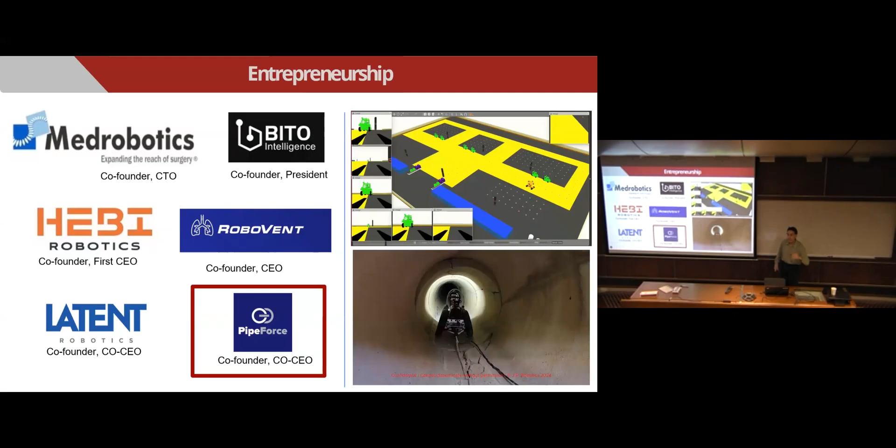So here, the hero of this story is not the robots. You'll see a robot, who cares? It's the mapping sensor, you'll see a little ring sensor. Being able to get sensor readings from confined spaces is one of the things my group is among the best in the world to do.

Building these high resolution digital twins of these pipes provides information and data not only that municipalities and cities need, but also if you're a construction firm wanting to build a new project.

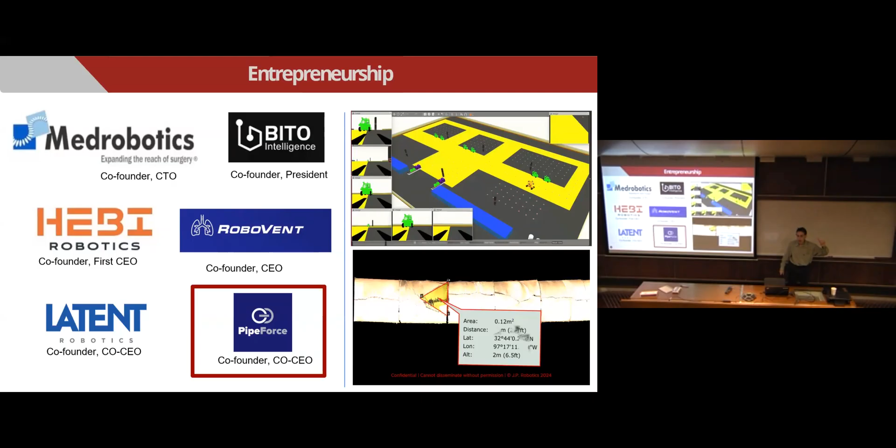I don't know how it is in Israel, but in the United States we don't know where our pipes are. In fact, anyone have a guess as to how often a pipe fails in the United States? Underground pipe? Every day? So one a day? Every minute? It's one a minute. So in the time we've had this talk, think of all the pipes that have failed.

So we're trying to fix that.

I also started this manufacturing institute, one of President Obama's manufacturing institutes. The idea was to bring manufacturing back to the United States, blah blah blah. I think that's stupid. What we want to do, as Americans at least, is be the innovators of the next generation of manufacturing. Let our peers in Asia and Europe have what they do.

And this is something else, it doesn't matter. The only thing is these two companies, this one I started with Mellon, are out of business. So they're not all success stories. Actually, I take it back. Success is what you define it to be, okay? But certainly still being in business is one measure of success.

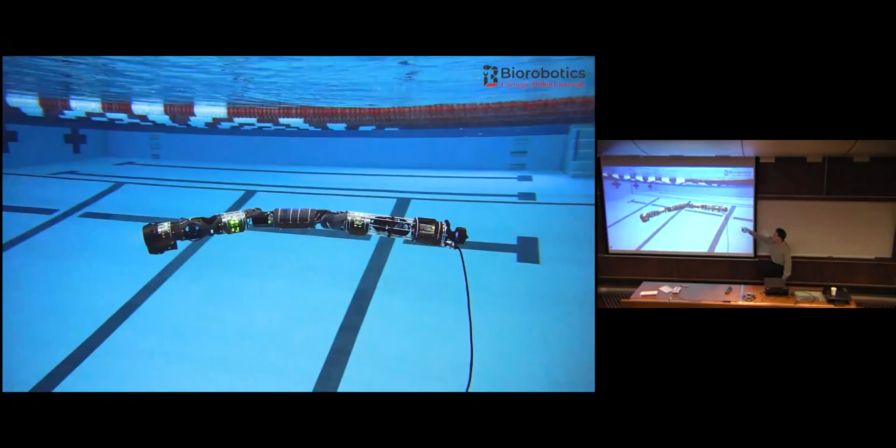So here's one of the robots we recently built. It's an underwater snake robot. The video is a little choppy, I'm not sure why. It took us about 6 months to build this robot, even though it's a pretty advanced underwater maneuverable robot.

Anyone know why we did it so quickly? Any guesses? There's two reasons. No investors? Nope. There's two reasons why we were able to build this robot so fast.

Nope. The first reason is we embraced modularity. So HEBI Robotics is that modular robot - we got very good at building modular systems. So maybe I lied, we didn't build it in 6 months. We built it in 20 years. It just took us 19 and a half years to build the modules, and half a year to build the robot.

The other reason is I've been very fortunate, as these two gentlemen can attest, to have been endowed with wonderful students, staff, and faculty collaborators to be able to do this kind of work.

One fun thing we're doing is this project that actually just got canceled - it's not a Trump cancellation, just so you know, but it was canceled. Saturn's a planet, and there's a moon called Enceladus which has the largest known ocean in the solar system. They wanted to go into the South Pole. This is JPL - this is where I used to go to graduate school at Caltech, and Caltech runs JPL.

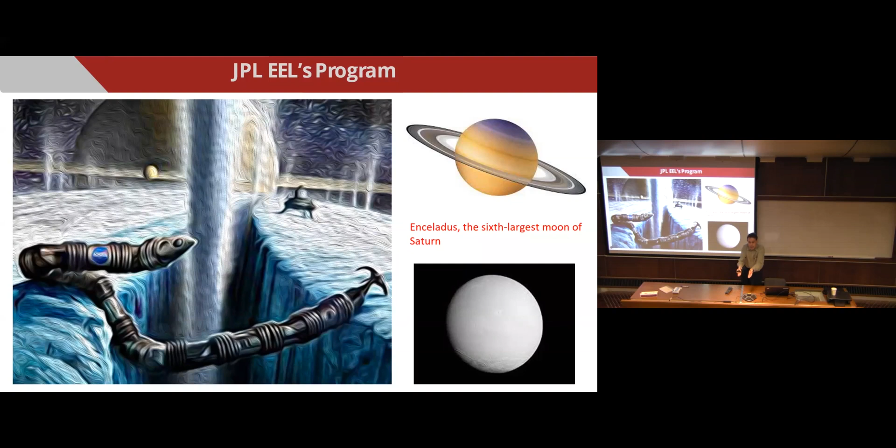They want to build a snake robot that goes underneath the South Pole of a moon of Saturn. There are these geysers, and it's only 2 kilometers thick. A robot goes inside and swims in the largest ocean. They were saying there'd be life there. There's no life there, we know that. But if someone says, 'Hey, do you want to build a snake robot to go to a moon of Saturn?' The answer is an obvious yes. I think all of you would agree, you'd do that too.

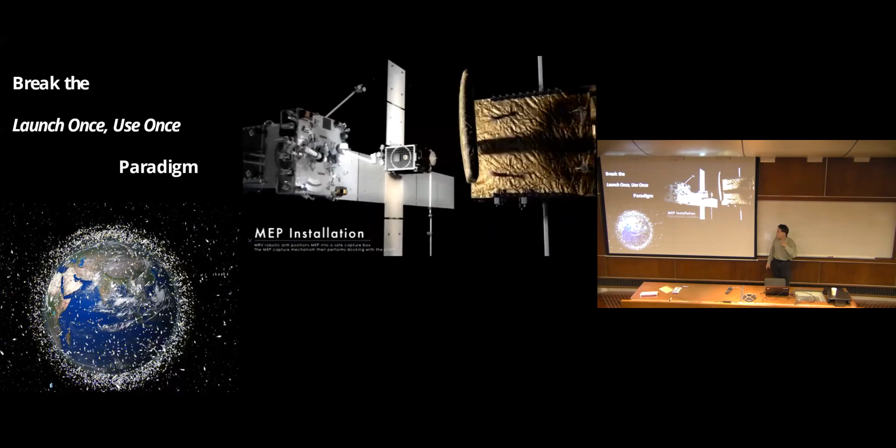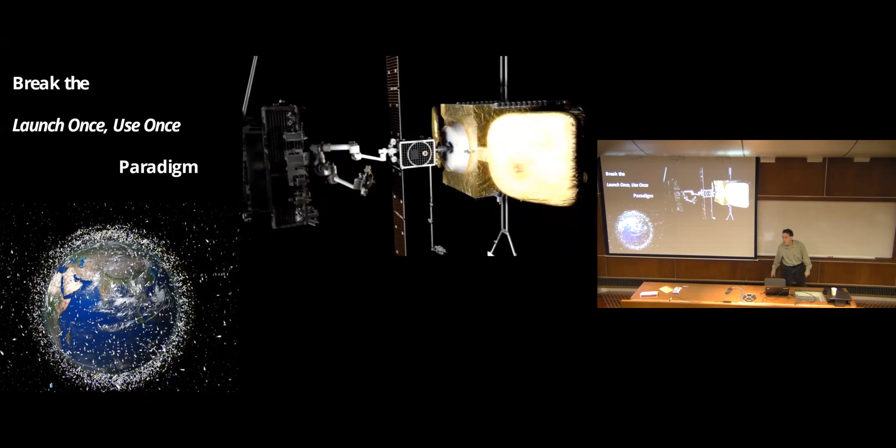However, there is other work in space that we're now doing. Space is no longer just education or entertainment for wealthy nations. It's actually a new business in space. So right now, anyone have a guess as to how many satellites are circling the Earth? 8,000. When I started this project it was 6,200, now 8,000. How many of them work? Half. Yeah, half, not five. How the hell are we talking right now?

So it's half, and the reason why is these satellites were designed to only work once. Once they run out of fuel, once they live their lifespan, they're done. It wasn't that they were bad—well, some of them are bad. So what we want to do is be able to refill the gas tank, so to speak. Really, what we're doing is putting a mission extension payload into the back of an existing satellite. It has a new tank of gas, a new navigation system, and then voila, you're back in business. Think of the trillions of dollars floating around in space, and all we have to do is solve a simple peg in hole problem.

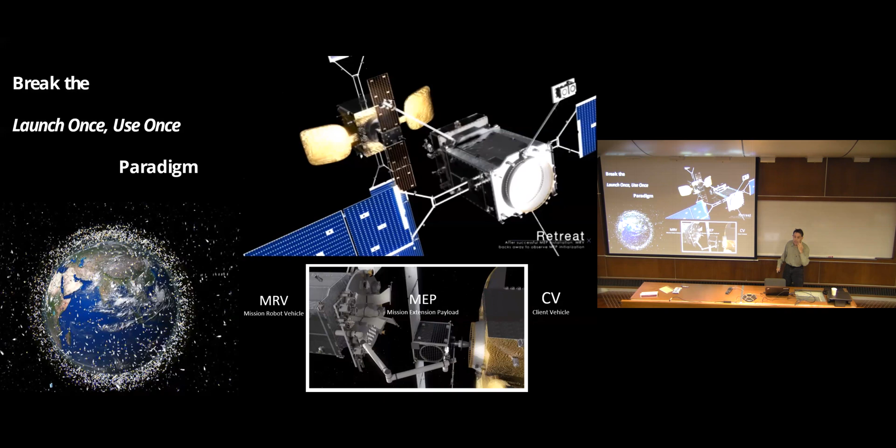The only thing is, it's a little bit different from a peg and hole problem—remember, you're in space, so you're floating around. It's a little more complicated, but still, I want to say it's not rocket science, but it really isn't. The real trick is managing contact, how to do planning with contact in space. And what we did for that is we built this system.

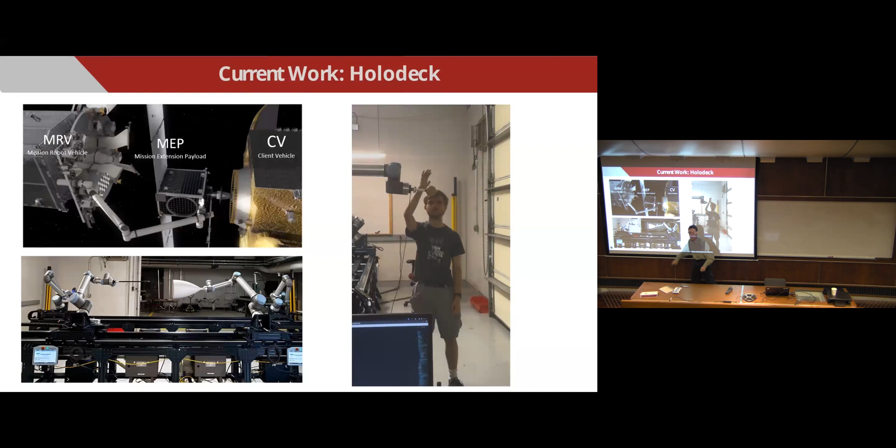We call it a holodeck. Here are these UR5 robots, on a rail. Here's the tailpipe of the satellite, here's the peg for the mission extension payload. And what we're doing is emulating being in space. So I'll play this video—let's see if it'll work. If you go up to the tail and give it a push, it'll float away as if it's in space, because we can't emulate lack of gravity in my lab, and you really can't do it anywhere.

Up until this point, their plan was to make it work in simulation and then launch into space and hope for the best. Here, not only can we simulate being in space, we can also simulate being underwater, or if you like being in honey, we can do that too. What's cool is now we can program these robots, understand the contact mechanics, and simulate it in a gravity-free environment—real data, not simulated data.

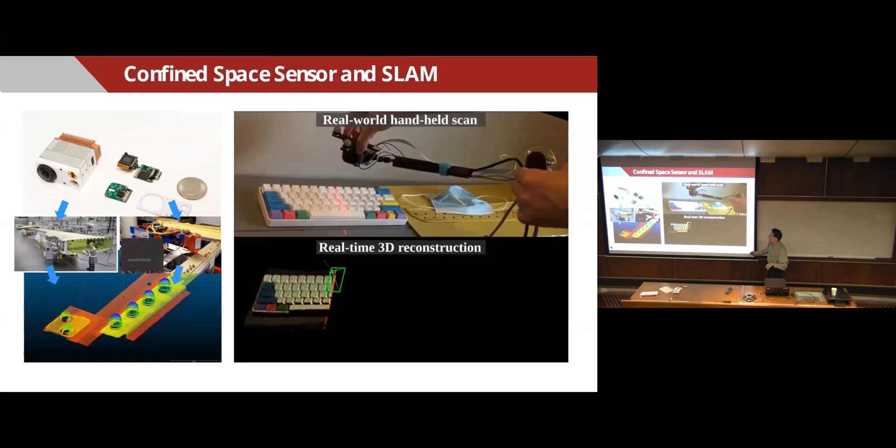So this is another sensor we built. We're very good at building embedded sensors, and here it is scanning things in. We built this for Boeing for manufacturing in confined spaces. And then another robot—these are force sensors that we've gotten very good at building. This is a needle insertion, ultrasound-driven needle insertion robot.

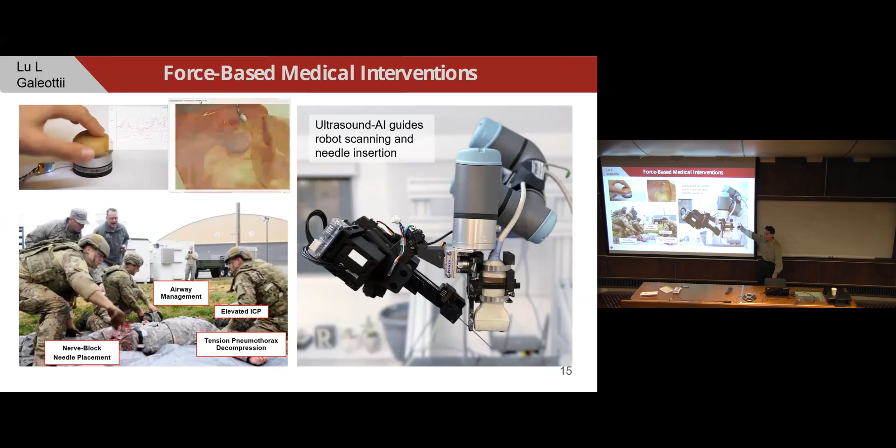Really, this needle insertion and closing the loop on force is nice. This ultrasound probe is processing the ultrasound data—that's the star of the show. It's closing the loop. The robot really isn't that big a deal. Actually, even closing the loop, the algorithm or machine learning we used isn't a big deal either. It's generating the synthetic data that matters.

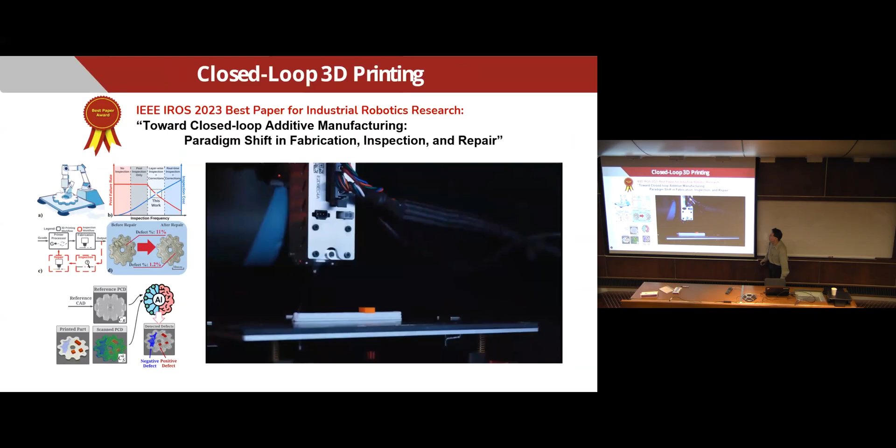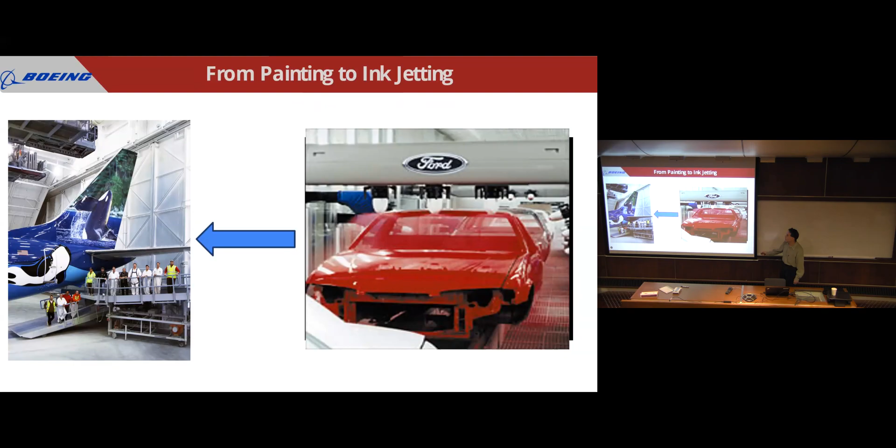We've gotten into putting our sensors into 3D printing machines to regulate 3D printing of materials, but also repairing devices out in the street, out in the wild. And then we do a little bit of car painting. I did this work with a deaf Jewish Cuban refugee who was our point of contact at Ford. And recently we started doing airplane painting, really inkjetting, with Boeing, with a regular white Christian American. But it's still a good project.

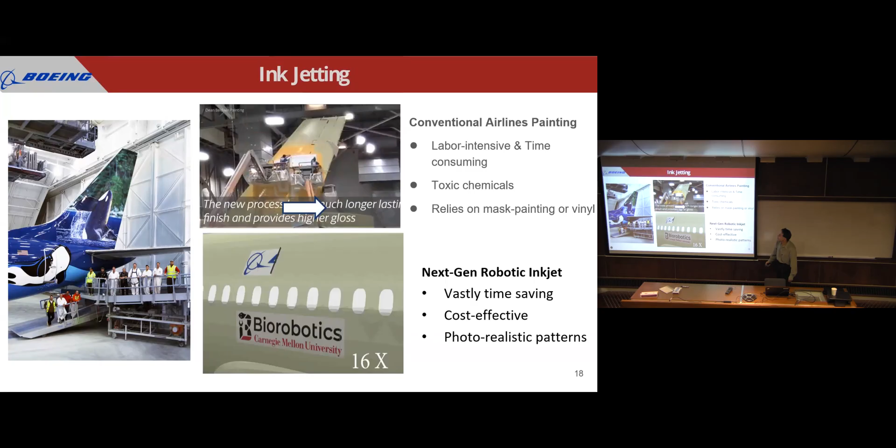I think I'm very fortunate to have these people work with me in developing these nice systems. But the reason why you talk with us among faculty isn't to build new systems.

That's what industrial engineering or project engineering people do. You come to us when there are scientific problems that have to be solved in order to build these systems. So as a professor, these are some of the ideas we think about in my research group: how to make problems simple, either through dimension reduction, interleaving search, and so forth.

Lately, some of you may be aware of the recent craze in AI. For those old enough to know, AI in the 80s was a bad word, now it's the word we all take. The thing is, to me, it's still like a black box. Here I am developing algorithms that do wonderful things with intuition, and then some kid in the basement of his parents in the Netherlands uses a machine learning algorithm and outperforms what we do. I'm still confused about that.

So you're all getting me going through this existential crisis of where research is going to go. I don't really believe machine learning algorithms are going to make humanoid robots, create an army and beat the good guys. Because, well, for one thing, the war better be over in 30 minutes because the power runs out then. I just think robots are such a difficult problem to play with that we still need the fundamentals.

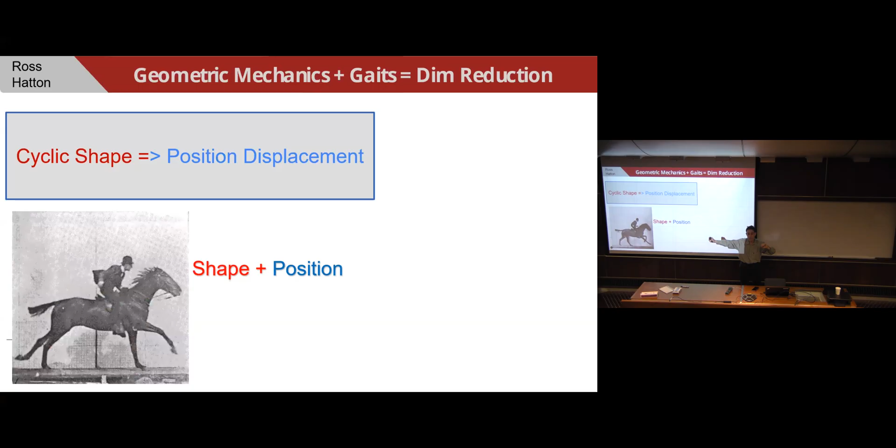So when a horse gallops, it's having a cycle in its shape space to cause a displacement in its position space. That cycle is called a gait. Now, you don't have to have legs to implement gaits, lots of animals without legs do it too.

To the roboticists here? Jacobian. Thank you, he who has seen this talk before. We call it a connection. It's a little bit different from a Jacobian, just a little bit.

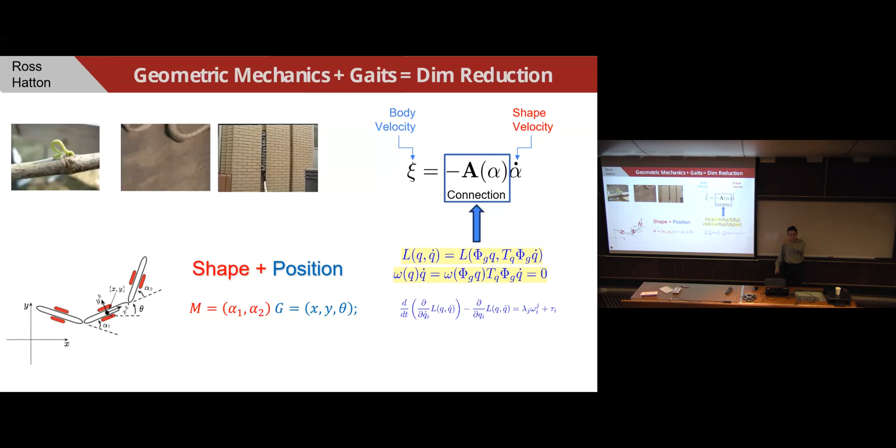However, our contribution to this work of geometric mechanics—people have been thinking about it, including Nobel laureates—ours was, and now the roboticists are going to go, really? That's it? Was applying what we know about the Jacobian to geometric mechanics. That's it. So let's look at this Jacobian geometric mechanics.

What I did here is I plotted a row of that Jacobian for this robot here. Its position is X, Y, theta, and its joint angles are alpha 1, alpha 2. So for its Jacobian, its connection, I plotted the first row.

It's a vector field. Each row corresponds to a vector, and each vector in this vector field is for a different shape. So if I'm at this configuration and I excite my joint angles in this direction, I'll get maximal X displacement. If I'm at this configuration and excite my joint angles this way, I'll get zero displacement, because the dot product of orthogonal vectors is zero.

So what you got to do is just draw a loop in this vector field and off you go. All right, that's hard. So what we did is we took recourse to Stokes' theorem. Stokes' theorem: you take the path integral, and inside is the curl.

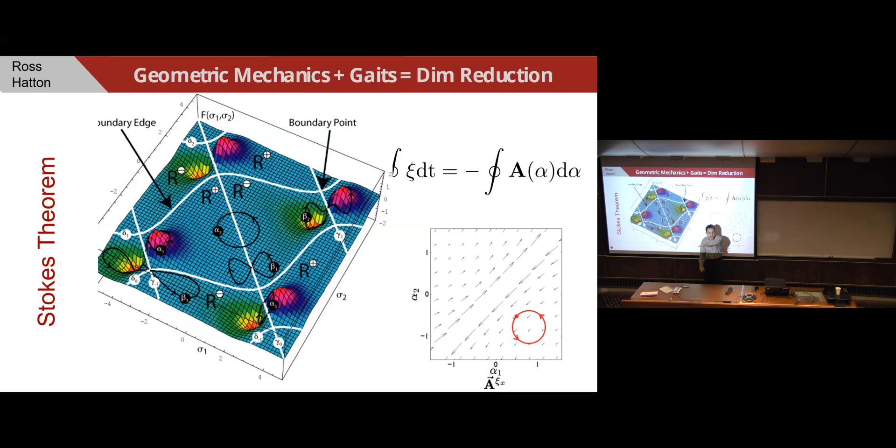You have the curl, and you have this beautiful height function where if you draw a loop, you get the same thing. You can just look at the volume contained in the loop, and that tells you how much you'll displace. So if you have this valley here, you get a lot of negative displacement. This is no displacement because the left and right are the same. These white lines are zero. This is all positive, all negative. You want to draw loops around big positive bumps or big negative bumps.

Voila, you're designing gaits. So this picture here is a little faded - I can't blame your computer for this, this is my fault. The vector field here, the height function on top, you see we're drawing a loop. In the X direction, we get that volume that displaces us in the X direction.

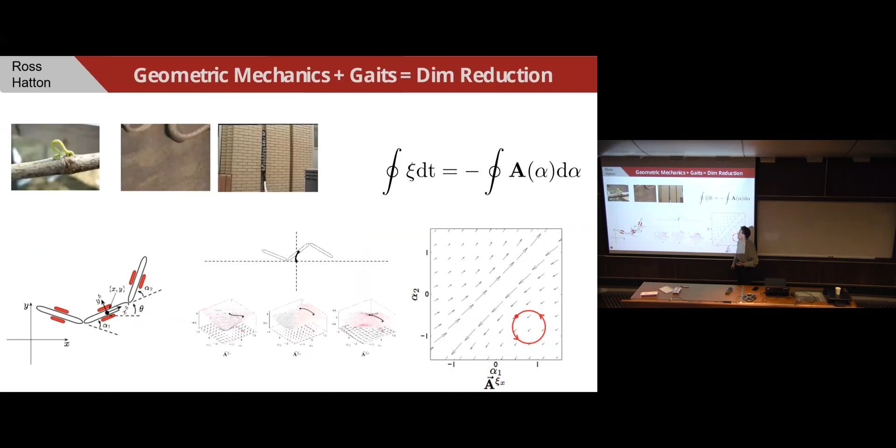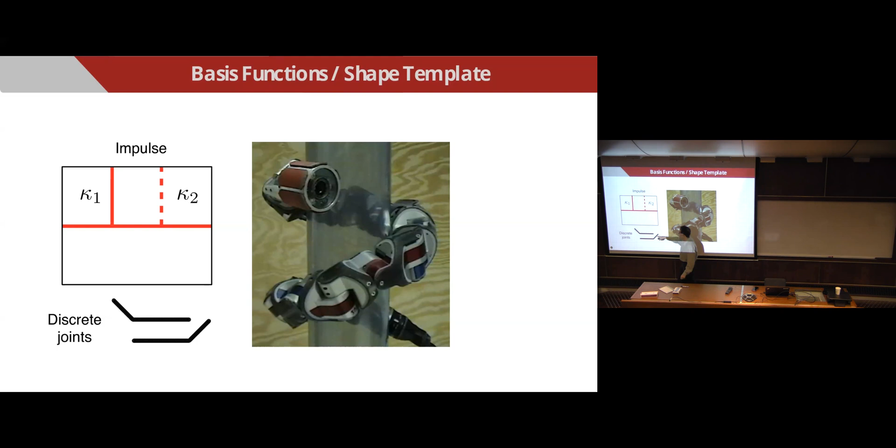Easy peasy. So you're probably thinking, what about the snake robots? Here's where dimension reduction first comes in. If you think of that 3-link robot where alpha 1, alpha 2 are joint angles, instead plot the curvature of that robot, and at the joint angles, you have a Dirac delta for the joint angle. So instead of doing the Dirac delta, what we'll do is use these beautiful sine and cosine functions of curvature.

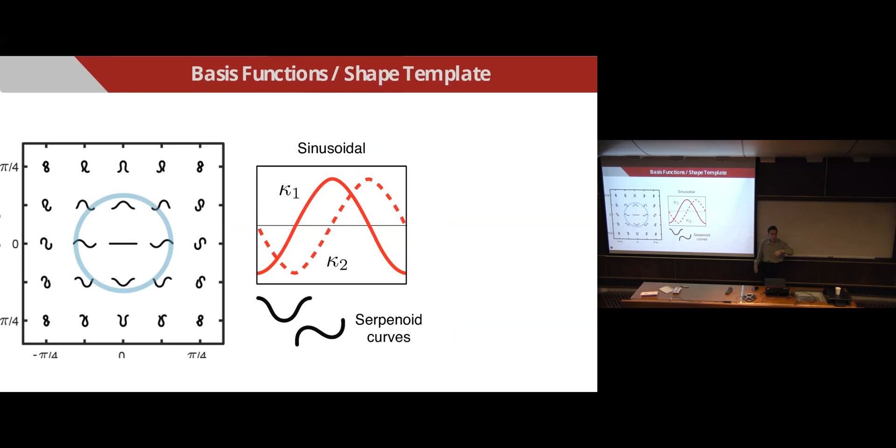So we're no longer looking at joint angles, we're looking at coefficients in front of modes. And by doing the inverse kinematics, so to speak, or determining what the loop is in our shape space of those coefficients for the modes, we can get this robot to move forward. This is a curve called the Serpenoid curve, which Professor Hirose intuited back in 1971. We were able to show, by combining something that Greg Chirikjian did, with our work, that this is what you get.

So what we do instead is we built these new actuators, called series elastic actuators. So you have a motor, there's a spring, and there's the output. If there's no load, everyone spins together. If there is some load, there's a torsional deflection, and from that you can compute how much torque is on that joint. You can close the loop for force, so now we have a way of delivering force or closing and sensing force with our actuators.

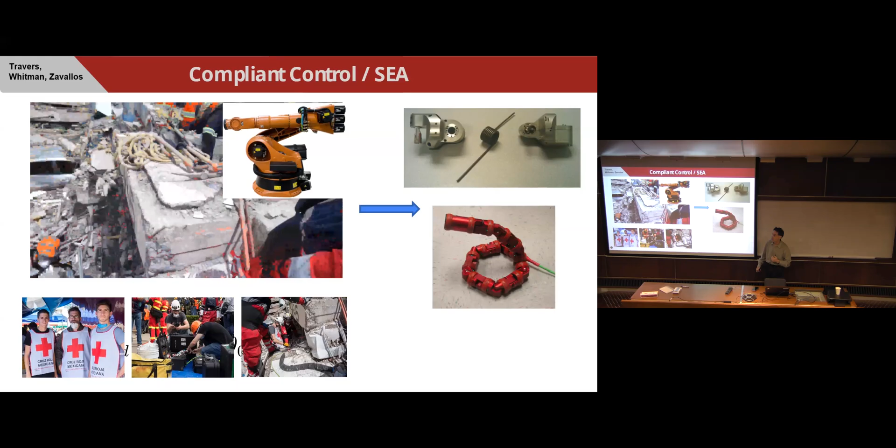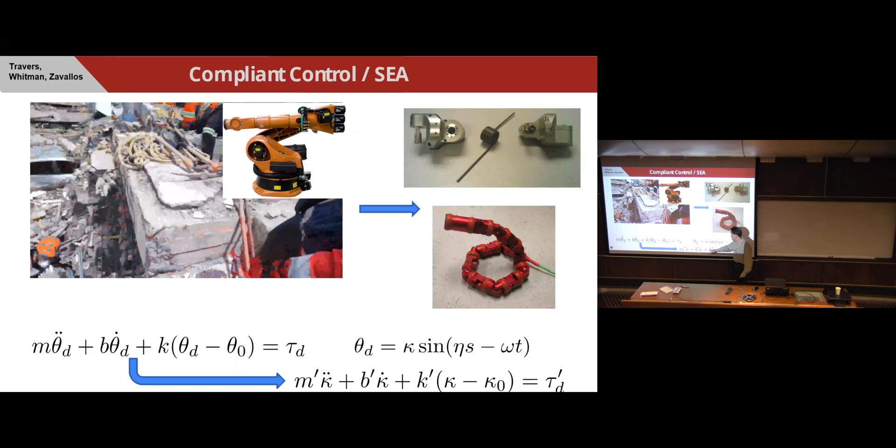So what we did is we wrote out this impedance controller. And again, we used our gait equations to get from 16 joints down to 2 joints. And we literally just run our gait controller, our impedance controller, on this gait space.

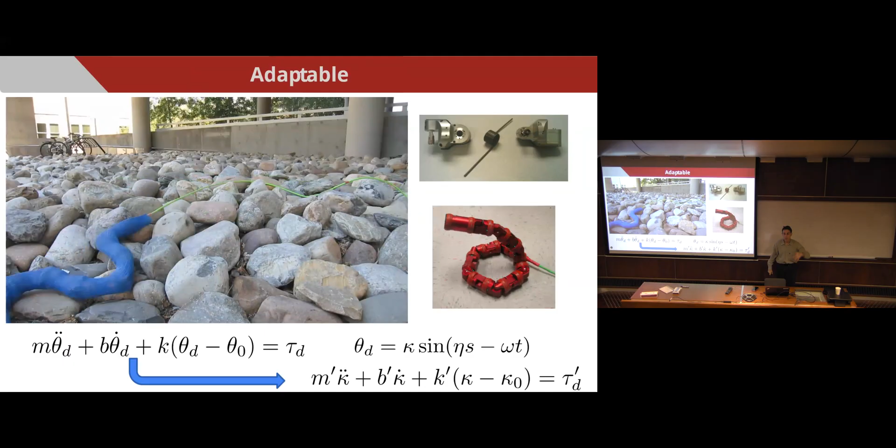We put the robot on this pile of rocks. It is told, go move on this flat ground, and the impedance controller does the right thing to overcome these obstacles. Of course, there's a certain size where this won't work anymore - so this is just a controls problem. Once you have to go to a higher size, it becomes a planning problem that I'm not ready to think about. That's one of the reasons why I'm here, to find collaborators.

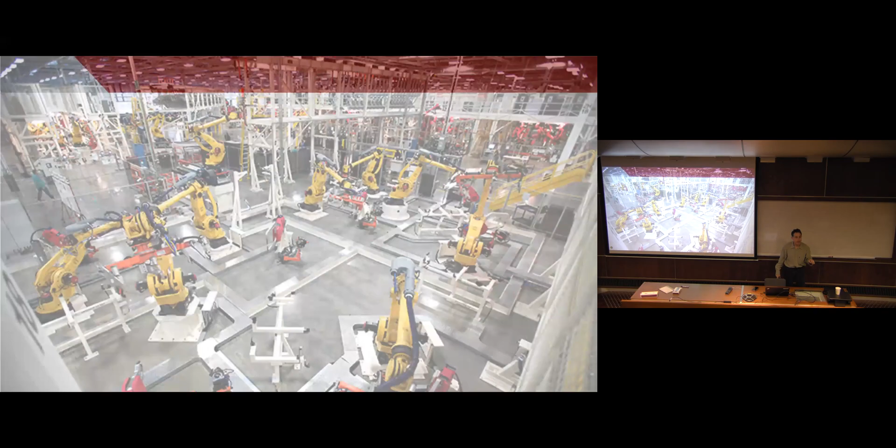So let's see, there's a funny cycle we're going to make here in terms of manufacturing. Remember I told you about that manufacturing institute - if you look at this manufacturing facility, do you see the cage for the robots? Where is it?

No, the cage is for the people. The people and the robots are isolated. This is what manufacturing is today.

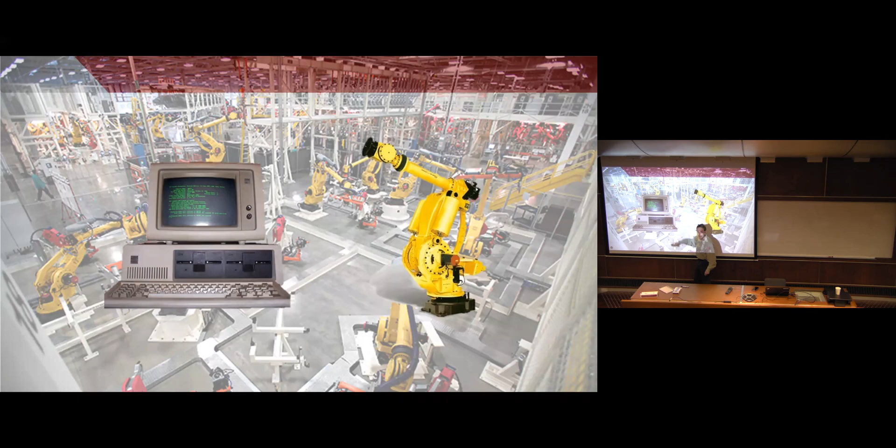What's funny is if you look at a robot in the 80s, and you look at a computer in the 80s—Dr. Degani, you remember these computers, those are floppy drives. Now in the 90s, computers got a little bit better. Robots stayed the same. And computers are even getting better. By the way, the founder of this company was my student, Matt Rogers.

So one of the things we want to do is make these modular force-feeling robots do other assembly tasks that conventional robots can't. They can't, because they have to be very precise—if they're off by a little bit, boom, something breaks. Now if you have compliance control, you don't need as much position control.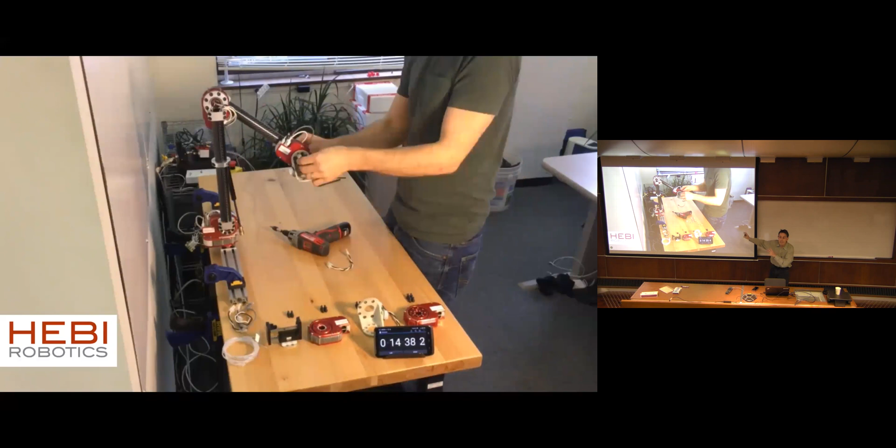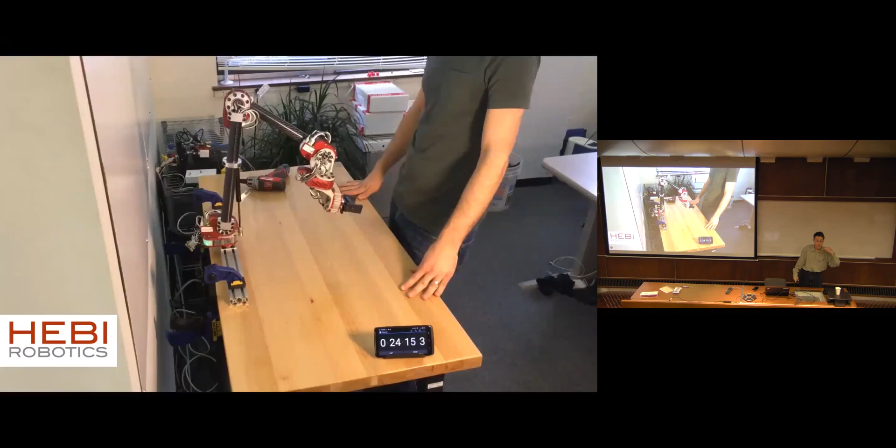Here we're showing one of our engineers building a robot arm in 24 minutes. So one of the things I'm trying to push is this notion of mass production in quantities of one. And if you can customize your automation almost every day, you can customize that product.

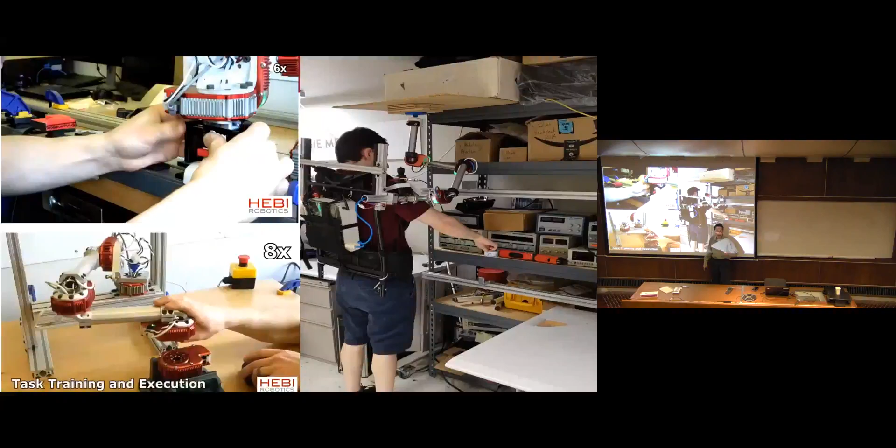So there he is. It's funny, look at all the different robots we're able to build with these modular robots. Here you can see he's teaching how to plug something in. Here we're assembling screws. What makes this a success is that he can feel the force in.

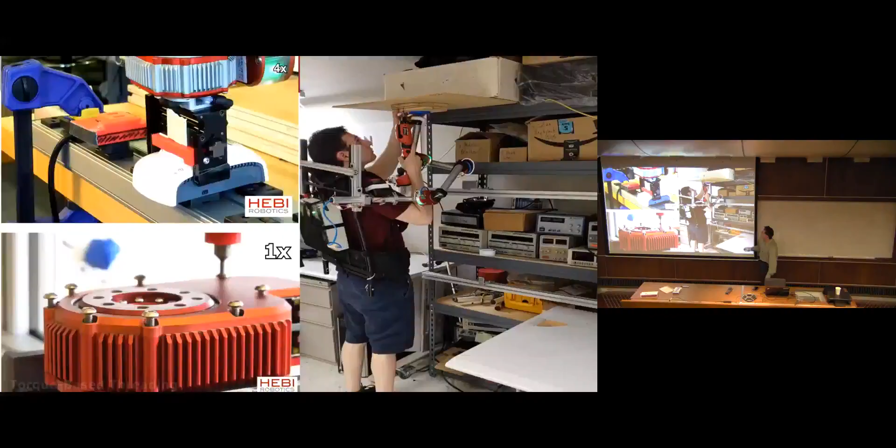This is Julian again, this is sort of as a joke—so exoskeletons are not a joke, let's be clear there, okay. But he built this backpack robot, which gives him a third arm, which people both in the auto and airplane industry wanted, because they want to be able to hold something up while they're doing their thing.

So the thing is, it's kind of a funny question: given a task, how do you figure out what robot to build? Okay, here's one little thing I'm going to confess. When we talk about something that's geometric in basis, I go into a little bit of detail. When it's machine learning, I just show one slide. I don't know why.

But what Julian came up with was this network—it's a discriminator-generator network. You pretty much give the robot a task, let's say navigate over some terrain. And you have some latent prior, I don't know, God gave it to you, or your friend gave it to you, who knows. It goes into a generator and it just generates a bunch of designs. We then evolve those designs using whatever evolution network you want—that's not a big deal.

And then you have this discriminator over here trying to figure out, was this an original design or an evolved design? Now some of you with machine learning background know this network from the vision community—they ask, is this a synthetic image or a real image? It's the exact same network, except is it a generated or evolved design? And then you build this discriminator, and now you have an arms race: can the generator build something that you can't tell is evolved? And when the discriminator finally says 'I can't tell,' you stop. That's how we generate our different modules right now.

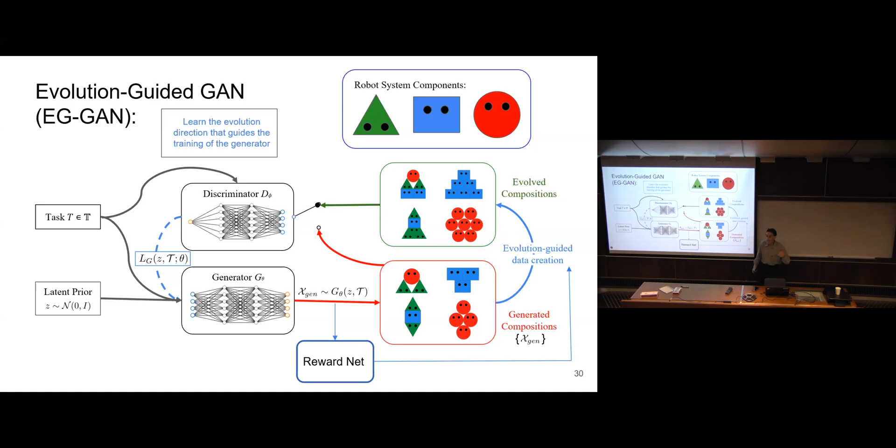And that's the best we can do. I hope we can do better. This reward net is a detail I don't want to get into right now.

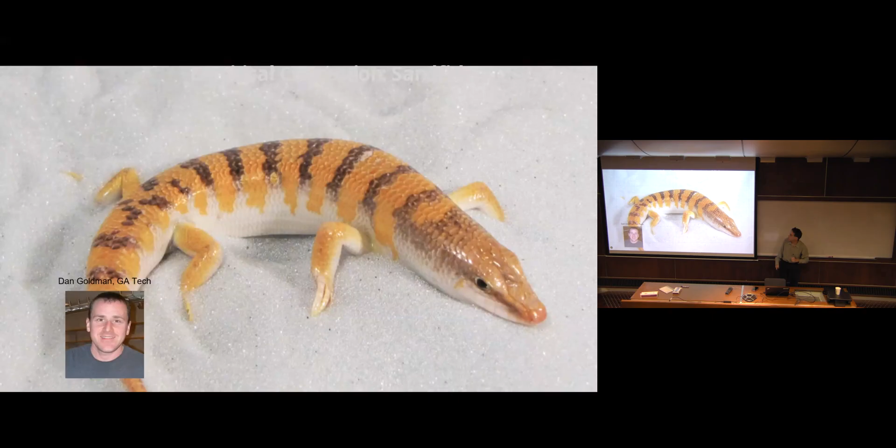We were challenged by going up sandy terrain. We couldn't do the sand. So at the same time, my friend Dan Goldman was studying these lizards called sandfish. These sandfish kind of tuck their legs in and go quickly in the sand. He built a robot, I just named it Danbot after Dan Goldman, in these little yellow BBs. It's a 3-link robot, like you saw before. And what he tried to do is simulate how to make his 3-link robot work in these BBs.

So Ross Hatton, my student, noticed this and called up Dan, and said, hey, we have an idea for you, we have all this geometric mechanics we can use. So what we did is we put the robot at every possible configuration, tweaked little velocities, noted them, and for some reason the universe was kind to us. The relationship between the input shape velocity and the displacement body velocity was linear, just like the connection, just like the Jacobian. I don't know why that's possible, but that's what happened.

So we created a height function again, and we're able to draw these gaits that just work instantly. There's no way a human could intuit to make a gait in a granular fluid to rotate in place. No machine learning algorithm will produce this without the knowledge of the geometric mechanics. This is something we're very proud of, because it was the fundamentals that got us this capability.

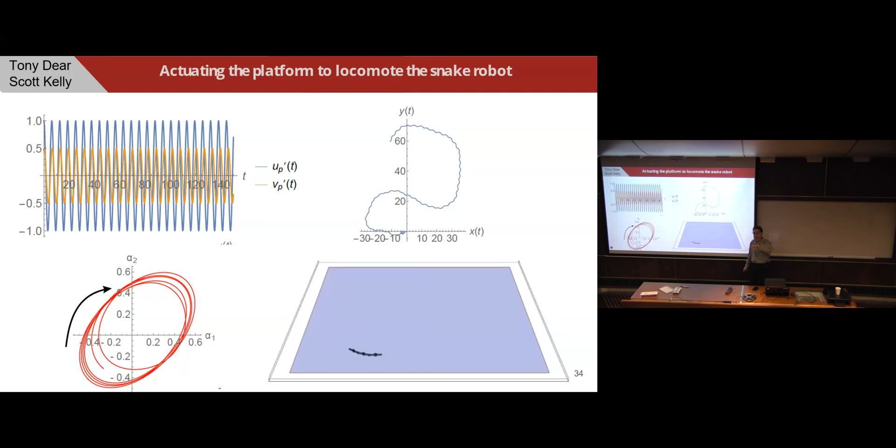What we did is we put this 3-link robot on a moving plate. My student, Tony Dear, working with Scott Kelly from grad school, we were able to develop gaits where either we shake the plate and the 3-link robot moves, or the opposite: you put the 3-link robot on the plate and it makes the plate move. That was Tony's thesis.

Now I have another student who wants to take this 3-link robot and cause another robot to move. For those who know about mechanics, what we're encroaching on is the experiment where if you put a bunch of metronomes on a movable plate, eventually they'll all synchronize. Yeah, we rediscovered that, but we really haven't gotten much further in this. I'm really hoping to figure this stuff out soon, because the funding runs out next year.

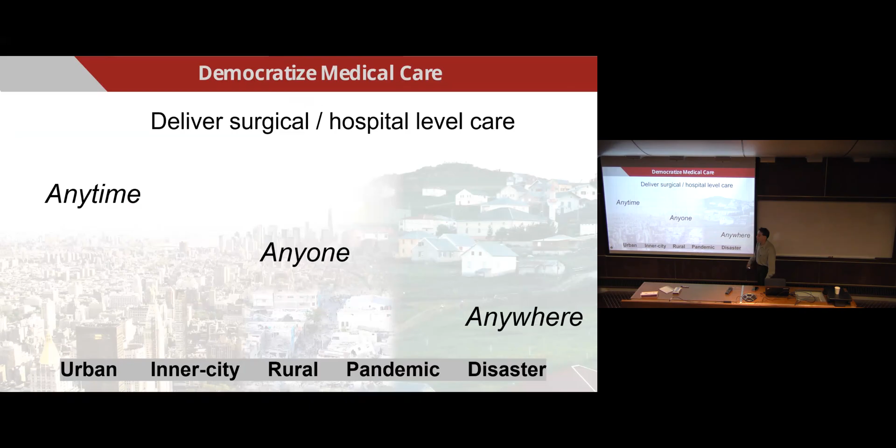All right, let me talk about medical snake robots, changing subjects. One of the things I want to be able to do is democratize medical care. I want non-surgeons to deliver surgery-level care. I want technicians to be able to do what doctors used to be able to do, so more care can be received anywhere by anyone. This is one of my personal things, a philosophy I started with a long time ago.

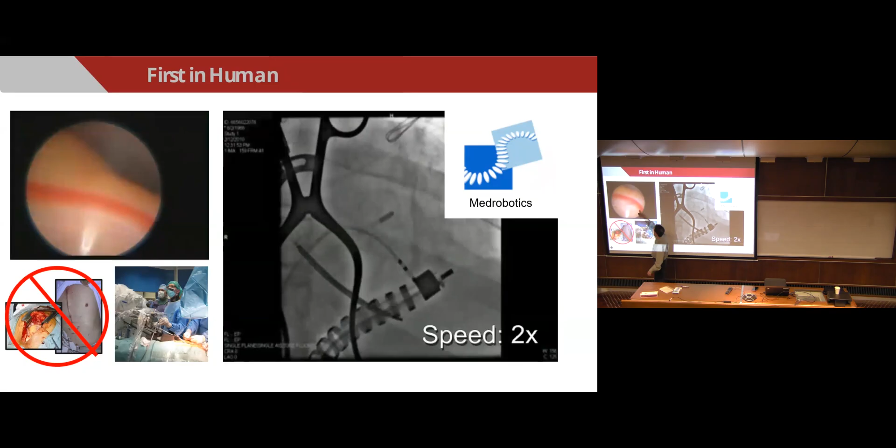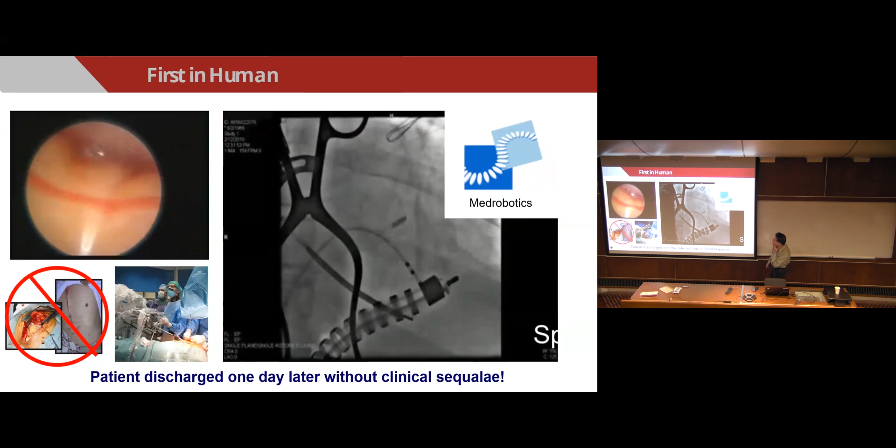So this is the surgical snake robot. I'm sure you all know the benefits of minimally invasive surgery. And this is the actual proud moment: this is from our first in-human procedure, where the snake robot is going around a 75-kilogram woman's heart. This is the direct visualization. Here's the beating heart, and you see her lungs up there. Your lungs are pink if you don't smoke. And there we are, that's nice. The thing that's pretty impressive is this woman went home the next day, and this procedure was done without a surgeon.

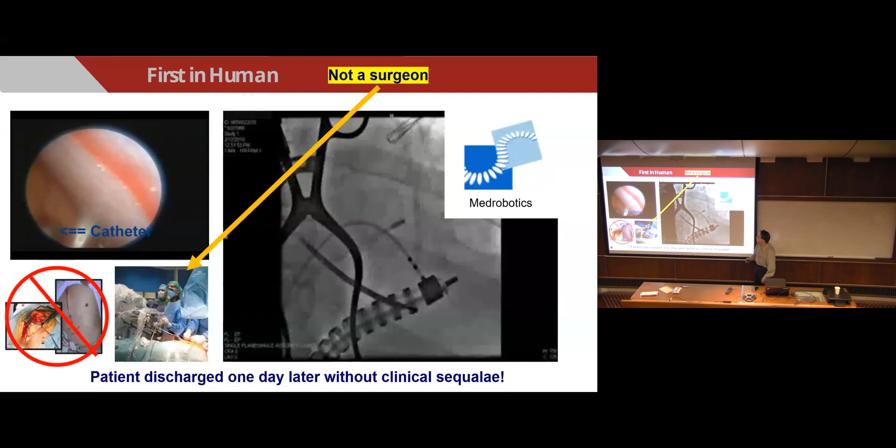But we did have a successful first in human procedure, and the company lasted 10 more years. Where we are now is this robot did clear the FDA. It's the first surgical robot to clear the American FDA with the word robot in its indication. So in the eyes of the United States government, Alon and I invented the first medical robot, if you want to believe that.

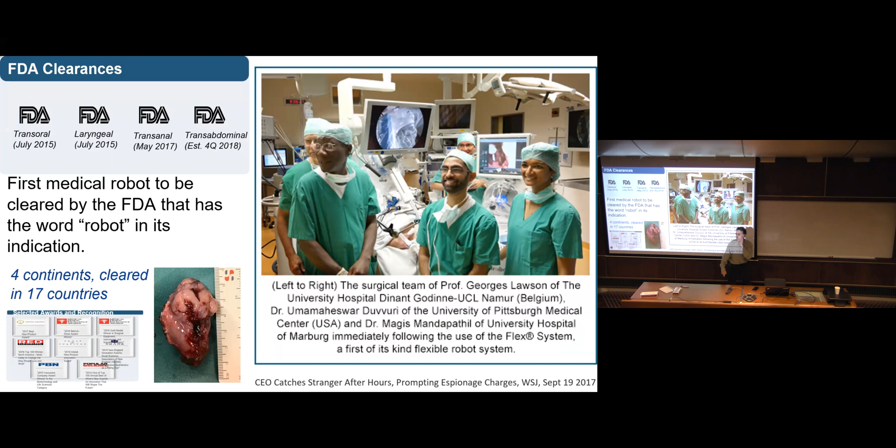This is cool. This guy in Belgium removed a 6-centimeter tumor out of someone's neck. No broken jaw, no radiation. The guy went home and had spicy food the next day.

This is what I want to work on, natural orifice surgery. This is one of my white whales, something I want to do. The idea is you go in through the mouth or up the butt, or in a woman's case, other organ orifices. You poke a hole in the luminal space and perform the procedure from there. A lot of you are thinking that's not good, but your luminal space is meant to heal, certainly much better than your flesh, bone, and muscle.

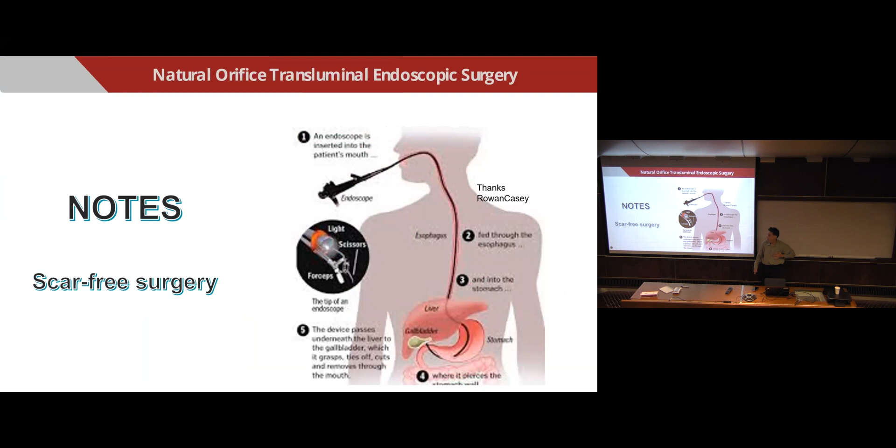So the procedure I was always interested in was going after the head of the pancreas for pancreatotomy. Because if you have pancreatic cancer, or if they suspect you have pancreatic cancer, you're in a lot of trouble.

Here, I know some of you didn't think you'd see a snake robot shoved up a pig's ass today. What's even better? Two of them.

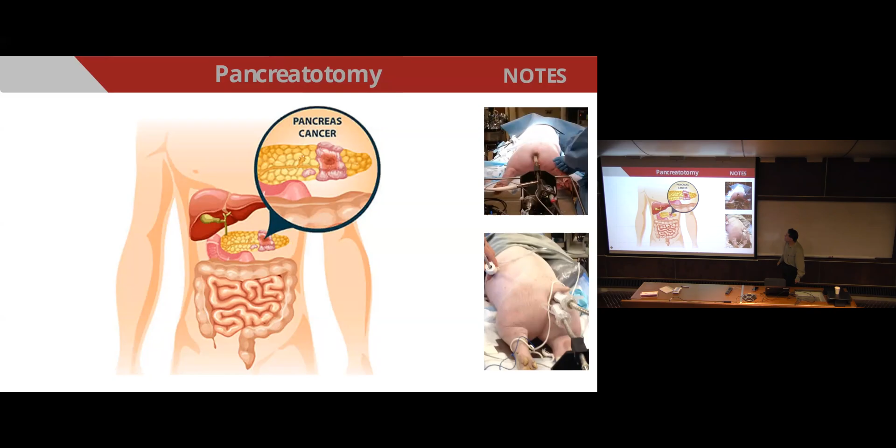So here we are operating on this pig. We needed one robot to see, the other to do, and we're removing the tail of the pig's pancreas, not the head. This is something that's really been on hold for many years because I haven't been able to convince sponsors to do this kind of work. But I have a good feeling that's going to change soon. This is another kind of future work I'm looking to do.

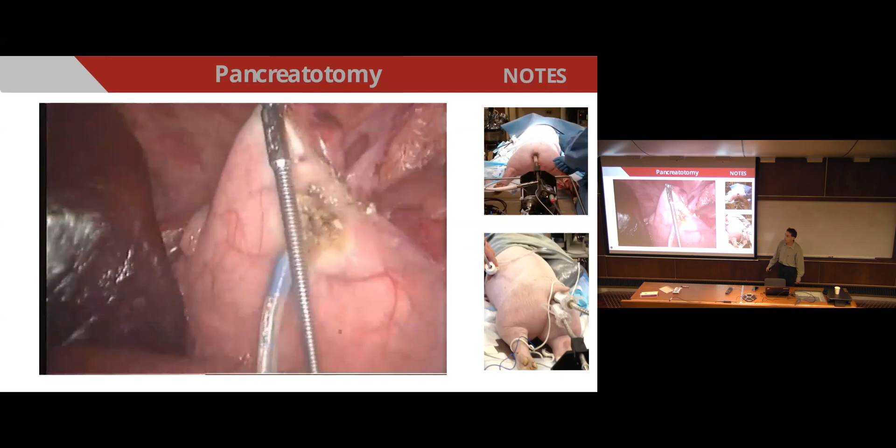So let me change subjects and talk about ultrasound. Here's this needle guided by ultrasound. Nobody likes looking at ultrasound, right? The only time you're happy to see ultrasound is if it's a baby and the baby is yours. After that, no. The benefit of ultrasound, however, is it's portable, not that expensive, and non-lethal. The thing is, it's noisy and difficult to interpret. There's a lot of problems with ultrasound.

What we did is we developed this algorithm, which I don't think is such a big deal. This is around the time when Dan was here at CMU. We developed this algorithm called U-RAFT, and it's able to do an impressive amount of vessel deformation. Actually, the algorithm itself is not that impressive.

What is impressive is that we generated the synthetic data. I really want you all to pay attention to me.

Can you, Jeff? Yeah, please. I came really far today, I had to take two trains. And likewise, when you come visit me, and I hope you do, I'll show you the same courtesy.

But what really made this work impressive is we don't have labeled ultrasound data. It just doesn't exist. So what we were able to do is develop an algorithm to synthesize ultrasound data. This algorithm, U-RAFT, is based on a deformable registration technique that I'm going to show you right now.

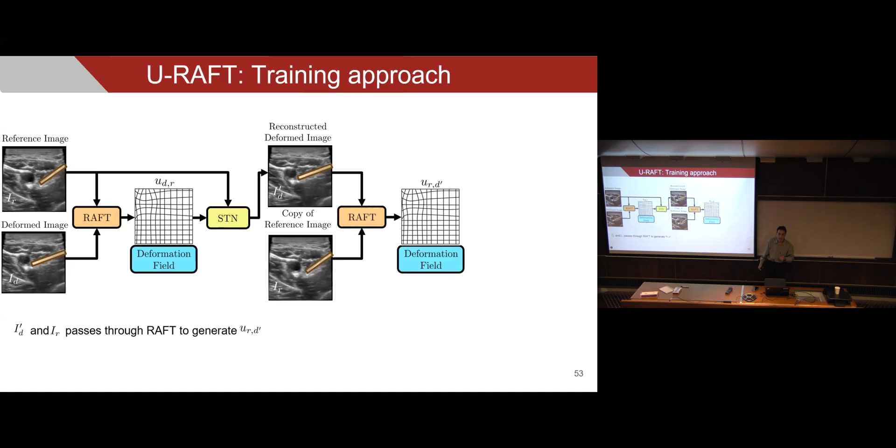We then take this reference image, put it over here, and do the same thing again. When we're done, we're going to have a reconstructed reference image that should be the same as the original reference image. So now we no longer have to label our images, we just have to force this image to look like that image. That's what we call URAFT, this unsupervised RAFT.

There are different loss functions you can use. I don't know which ones are best, but my student likes this one the best. And with this, we can then synthesize all the data we need in order to run these algorithms.

What's scary about this, and this is what's freaky, we go 2, 4, 6, 8, maybe 10 newtons at different deformations for the training. We can interpolate to 0.1 newtons, that's fine, but we can extrapolate also. In fact, this thing can go and predict when vessels collapse, which is weird.

There was a big ventilator craze. I think in the interest of time, I'm going to skip over the ventilator work and talk about—I have at least 3 or 4 more topics, but only time for one more.

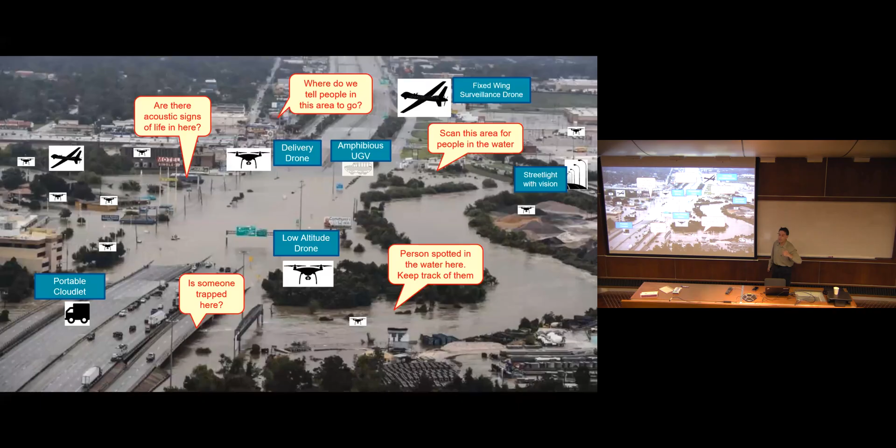So I'm going to talk about this multi-agent search work. The application that motivates this again is a search and rescue application. If there's a big disaster, what you want to do is figure out where can there be signs of life. We, the roboticists, computer scientists, engineers, are going to send the robots out to look for the signs of life. The question is, with our limited resources, where can we send the agents?

So let's say we have some understanding as to where things are. We think there's a lot of victims here and a lot of victims here. We can exploit that knowledge, but we may get stuck in a local minimum. The other idea is we can just explore, constantly look around, but then maybe we won't be exploiting the information that we have. What we want to do is balance both of them.

This is the so-called ergodic search. We're going to develop algorithms where the trajectory spends a proportionate amount of time in a region in proportion to the belief that there are victims present. So if there are a lot of victims here, we'll spend more time here, but we still spend some time going in between.

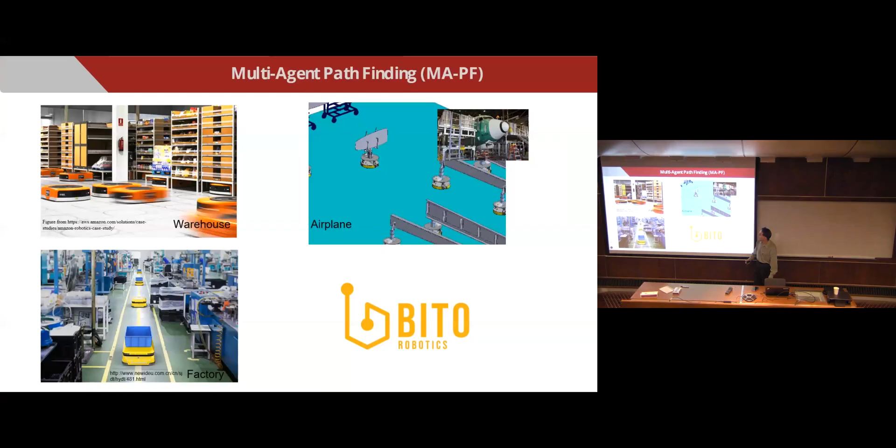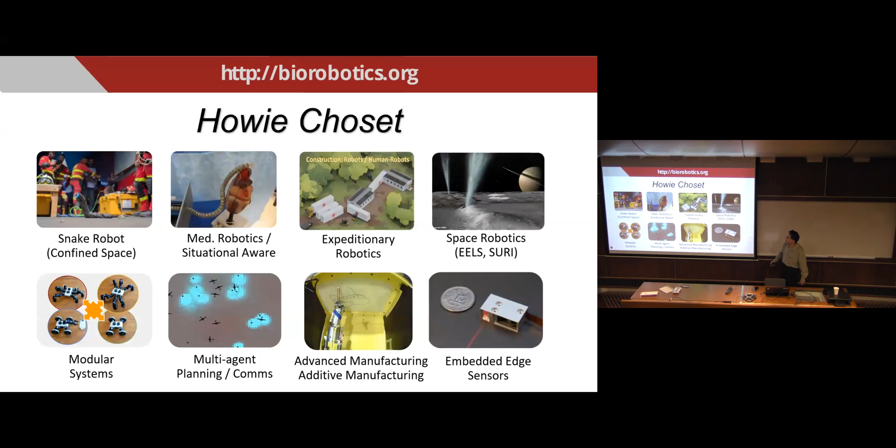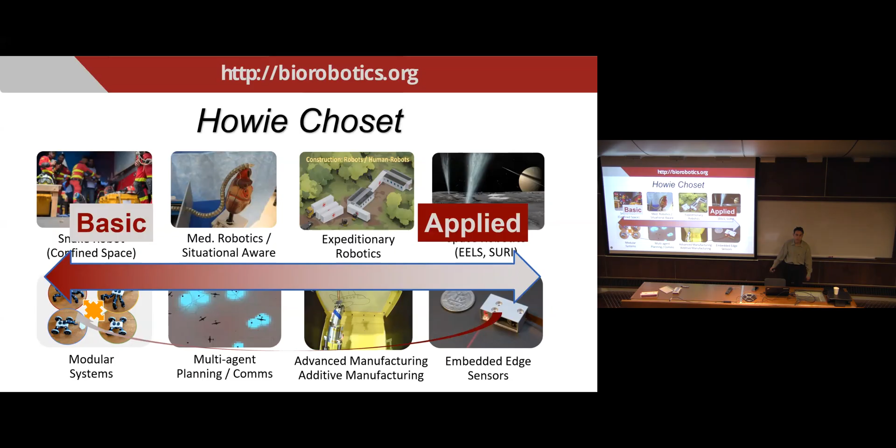Well, again, my lab has a lot of projects. As Amir said, we run the pipeline from basic to applied research. I like to think that the applied research drives the basic research. There have been these themes in the work, from confined spaces to biological inspiration and so forth. These are the deeper ideas that I think we're pushing. I just don't see how to put them all together with that black box yet. That's me—thank you for your attention, and I'll take some questions.

We spoke earlier about the modular snake robots and reducing the dimensionality by defining gaits. Does that only apply to configuration spaces that are manifold or that are not continuous? Because I saw a sort of configuration space curve, and... I don't think that's the right question. I thought you were going to ask, is it limited to systems that have a cycle, a gait?

Oh, I actually have another question—similar. I was thinking, do we limit ourselves also? Why can a car or a helicopter or a plane fly or drive faster than something natural, like a cheetah? It's because it's not confined to a gait paradigm. Well, that's a different thing.